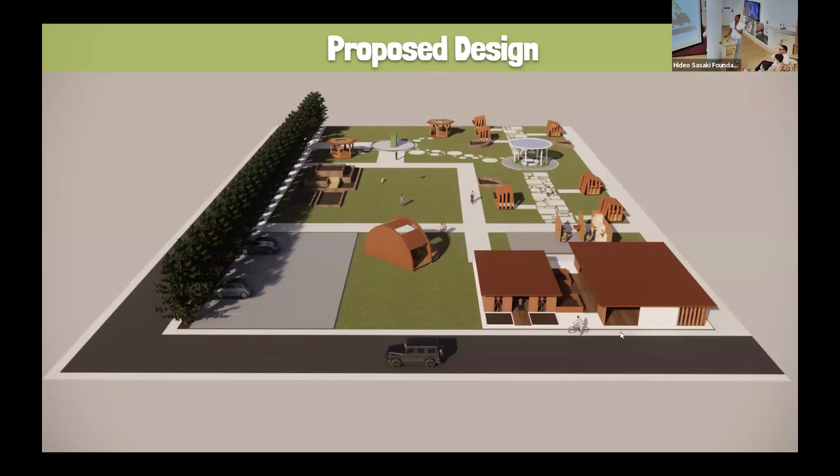So here's my proposed design. This is a key of how to walk through the site, starting off with the side entrance where people from the community center can easily walk through my site. Starting off, you will walk into a welcoming placard. This is a design that I believe can be used.

Moving on downward, you'll come into the walkthrough for the cubicles. Here I imagine a lady could be standing next to the fountain with her dog, and the fountain will have a green barrier. There will be concrete pillars and a glass roof.

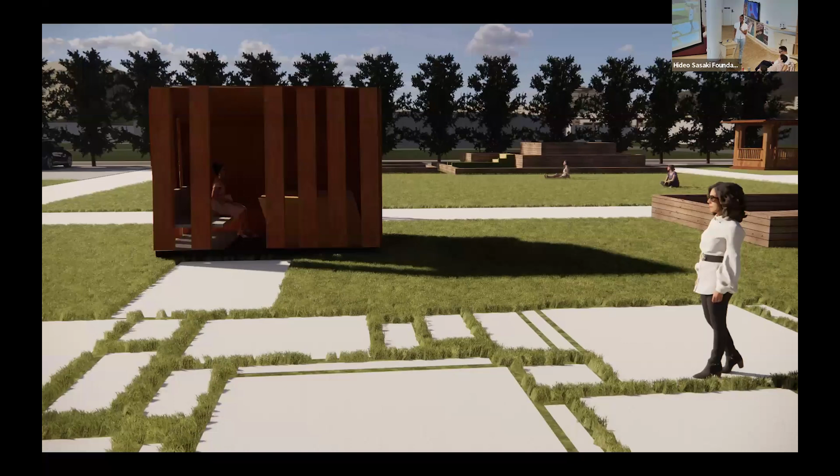Here's an example of the cubicle space being used. This cubicle is made with wooden planks, which is really great because it allows for visibility throughout the site, so even though you're in an enclosed space, you still feel like you're outside. The cubicle has a slanted roof to combat environmental challenges like snow, which happens in Boston.

Next off, we have the open pavilion. This is a space that children from Mattapan, and anyone in general, can use to climb upon blocks. It's sort of like a mini playground, but composed into one little wall section.

Behind it is a place where older seniors and anyone could chat or play chess and other games. This area also combats the issue of safety for children, since there's rubber plastic on the bottom.

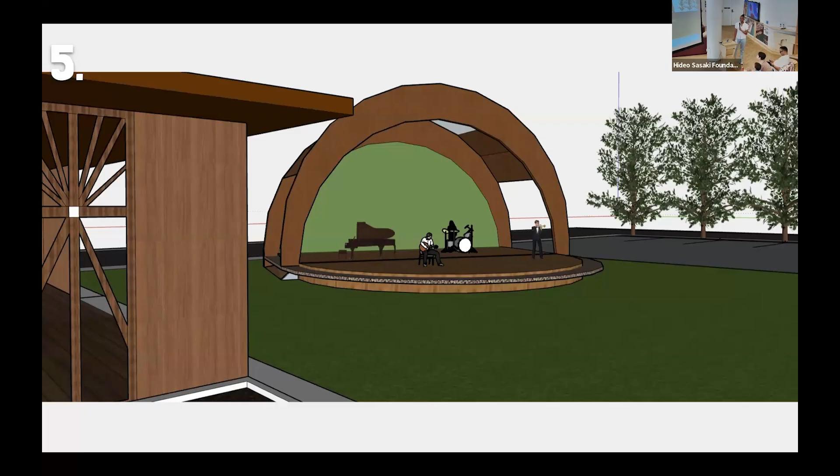Next up is a design that I have for a stage. Mattapan already has a stage inside of it, but I wanted to give the opportunity for people to perform, children to perform, and other musicians and presenters to perform outside on the site.

It's also connected to a larger pavilion, which can be used for chatting, just sitting around, and having community events.

In conclusion, my design will promote care towards the outdoors, create better security, allow for more use of public space, engage individuals towards learning about the environment and ways to manage a garden, and encourage socialization for everyone, especially teens and adolescents.

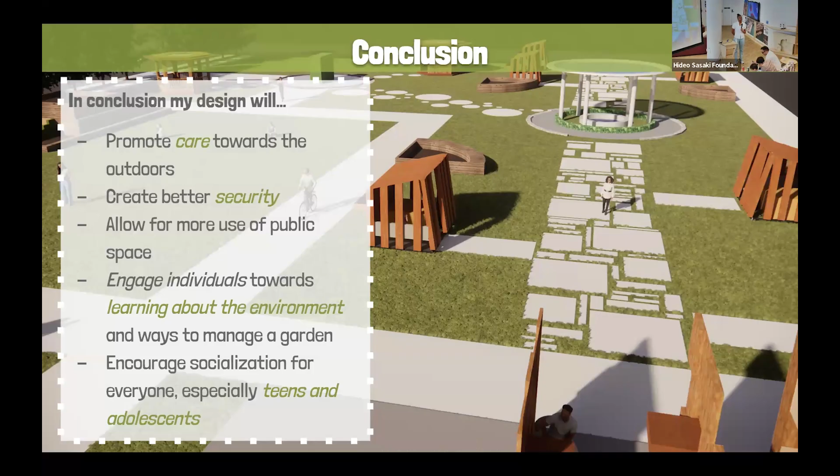I happen to be the chair for the Greater Mattapan Neighborhood Council, so I know this site very well. I grew up probably two streets over from what you're talking about. Could you go back to the screen that had the school, I think it was more in the beginning, where you were trying to give us a sense of location? Right there, okay. So there's the Mattahunt School and there's the community center, and as you said, there's Mattahunt 1, 2, and 3.

The nice thing I think that you did show was that that is a completely open area. And there is a need, if you have any ideas, about how you would connect from Livermore Street and Hebron Street, right? Because Hebron is a one-way, and when you're coming down there's a lot of traffic on Livermore, both directions. So how do you imagine that people would be getting to the site without impeding on the Pendergast Preventorium, which is actually conservation land?

But getting in and out of that area while discouraging cars, of course, how do you imagine that people would get to that part of the site? Thank you. So I imagine that people could get to that part of the site...

Well, first, I had an idea earlier on to extend the bus connection of the 31 bus route. I'm not sure if you could really see it here, but there's a 31 bus that parks right outside of Livermore Street, so you could turn onto it. So I was thinking that the bus route could extend and kind of circle around, because there is a roundabout area which would allow for that to happen.

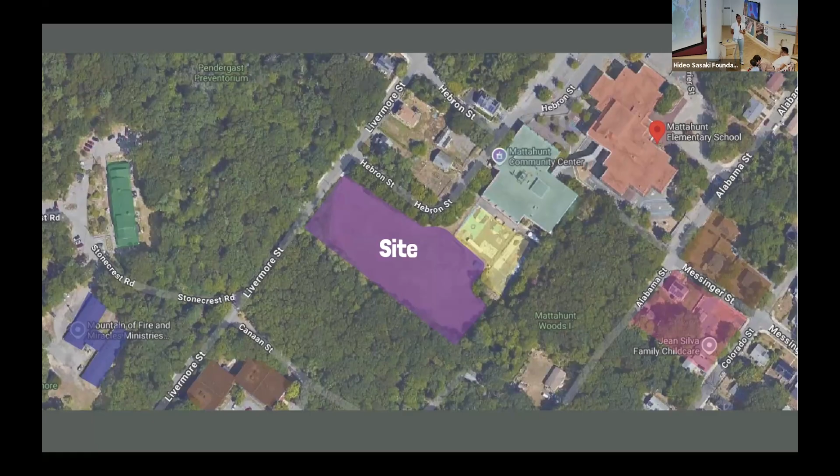Yeah, okay, so I would say some of the lessons learned was really learning how to implement my ideas for design in the available space that I had, because I feel like a lot of the designs that I was thinking of and trying to develop wasn't really correlating and fitting onto my site, and I had to figure out ways to keep it together and actually be logical and usable. Another challenge that I had was...

just figuring out the logistics, because I do have the parking space right onto Livermore Street, but then I have the side entrance further down where the community center is. So I think another thing that I would like to further consider is where my main entrance would be and how the stage would kind of interfere with that.

Good afternoon, everyone. My name is Kelly, and this is my project on Jamaica Plain's Flower Haven. Starting off with an introduction, I am a junior at Excel High, and I enjoy walking in the Arboretum during the summertime, but I also like to ski and ride my bike.

Here's a table of contents. These are the things that we'll be discussing today in my project, which are the background site analysis, problem statement, community engagement, proposed design, details, and conclusion.

With the existing conditions, this is my problem statement. The cracked and uneven pavement in the parking lot creates a safety hazard for its residents. A single use combined with intense sun exposure and impervious surfaces prevents people from entering and gathering, often feeling isolated.

With my solution, I wanted to create a vibrant place to gather safely. The community will feel a sense of belonging to have access to multi-use spaces such as murals, custom bike racks, seating, shade, and other engaging elements that merge together as one.

With the issue of my site, I want to create a survey to gain feedback from the neighborhood. You're probably wondering, why a survey? It would help understand people's experiences in the neighborhood, identify who lives there, give ideas for problem solving, and gives real feedback from people using the space.

Here is my proposed design. You can see furthermore into the design after, but you can see that there is a median between the trees, and there are 2 different sections to it.

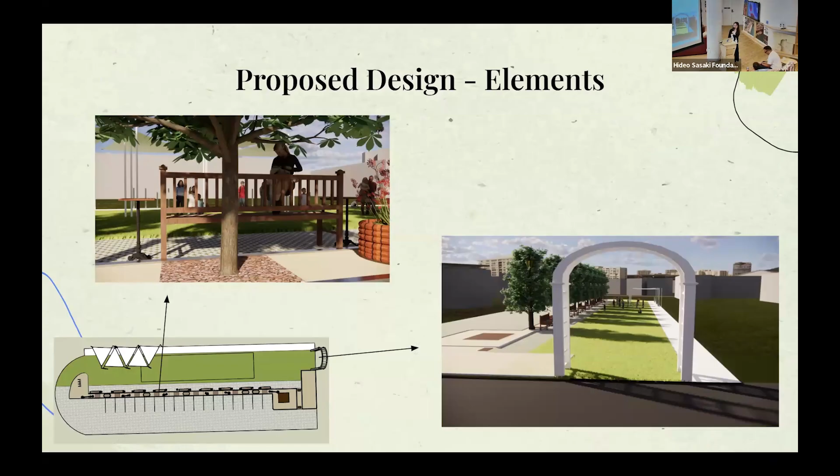Within the site, you saw these giant barrels within the median of my site. These are the garden beds. Up top is a side view and the plan views on the bottom. Here is a section of the different layers of the garden bed: soil, compost, plant waste, and wood.

Here is my final design. You can see the shading structures in the trees. With this image, I wanted to depict what it feels like walking into this space. The youth center I mentioned before would be able to use this space.

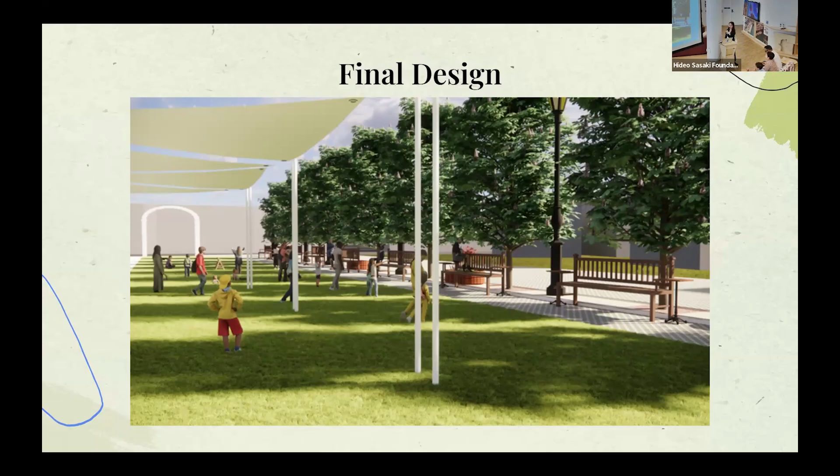In this image, I found that a lot of adults and children like to roam around in grassy areas. With this image, you can see that a lot of children are here with their parents. With this space, I wanted to turn this parking lot into a public space that can address some of the issues in Jamaica Plain, such as a lack of shade, seating, and greenery. Children, pets, and adults can enjoy a nice area that complements Jamaica Plain.

Thank you. The thing I've been trying to figure out is like, what are the actual causes of the hazards? I mean, like the actual cause of the hazards.

I feel like the majority of areas in Jamaica Plain are very crowded and busy with cars. So I want to create a space that is comfortable in the area, but also accessible for people that might want to go there, while also being able to drive through.

Hi, I just wanted to say great project. It was really thoughtful and your presentation was super clear. So congratulations. My question for you is, looking at your site, it looks like it's about half parking and half park in your design. I was curious how you struck that balance, and maybe why you didn't consider taking over more of the site and reducing the overall parking.

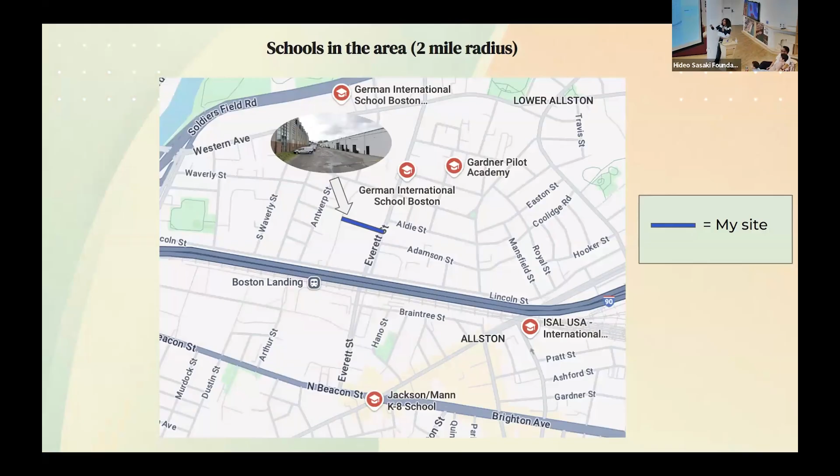This is my site, the blue line, and these are all the schools in a 2-mile radius. I wanted to show this because I went to the Jackson and constantly went through this area. If you look at this area, it doesn't look like a very good place for an elementary student to be walking through all the time.

There's lots of extra bodies of water—well, not bodies, but puddles. And I remember coming home and often having to change my socks immediately because it would be wet.

This is my problem statement. There is a lack of outdoor and community space, and also an overwhelming amount of concrete and unpaved roads. Concrete has lessened the visual appeal of the area, and water cannot infiltrate the ground properly because of all the concrete, which causes flooding. Brighton also has a high amount of 911 calls due to student mental health.

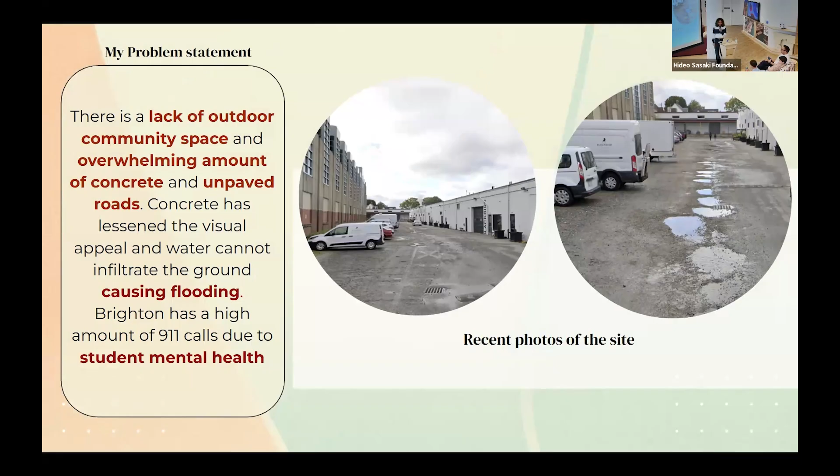After assessing my problem statement, I decided to make 3 goals: 1, to bring attention to the space; 2, to make the space green; and 3, to make the space accessible.

All the main answers to these were yes. I asked these questions because I often felt this way, and I wanted to see if people agreed with me so I could add that to my project.

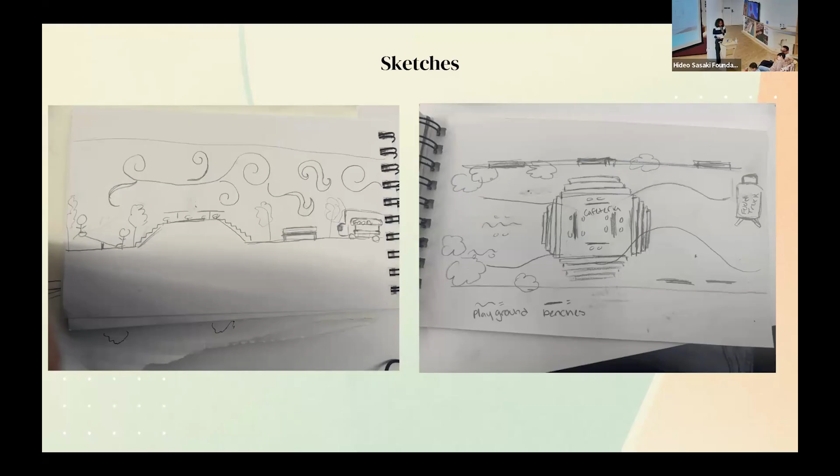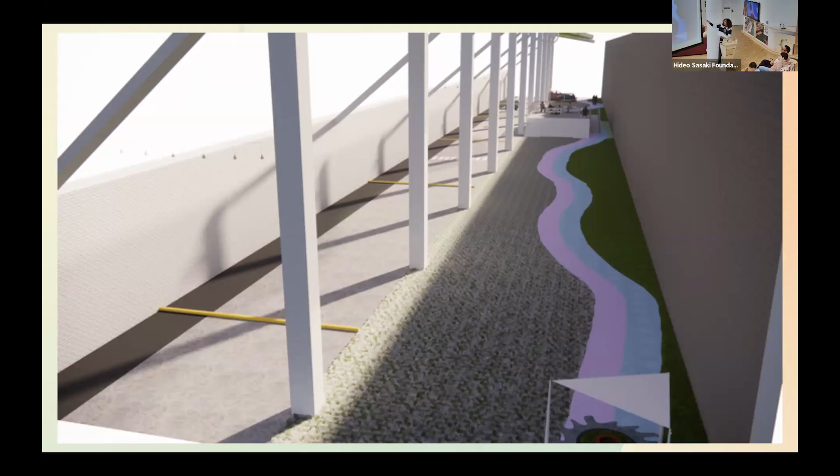And this is a picture of my accessible pathway, which follows ADA guidelines. And on the sides, I have a patch of greenery, which you can't see it from this angle, but there's glass roofing that curves along the line so water can still reach the grass. And there's also pervious ground on the other side. And this pathway leads to another bench if you want to maybe sit in solitude and read a book.

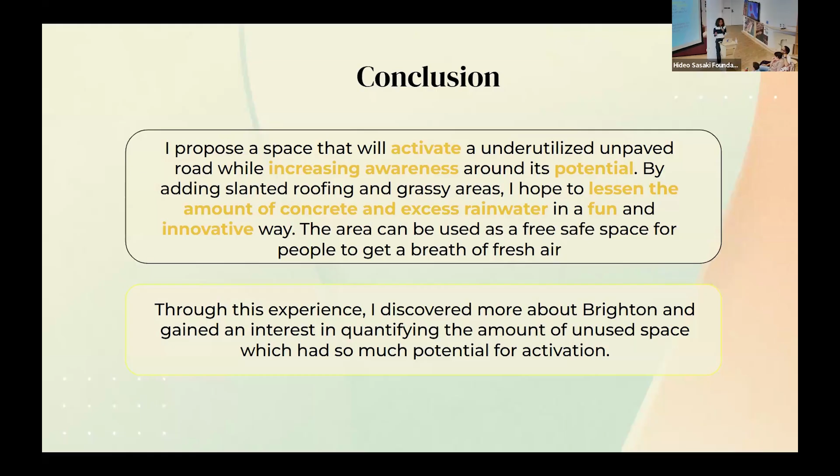In the winter, I sort of intended the spaces that were not in reach, like the wooden benches, to be packed away, and for this part to still be used since there's still roofing over it. I felt like it could still be used. Yeah, I think that's my solution.

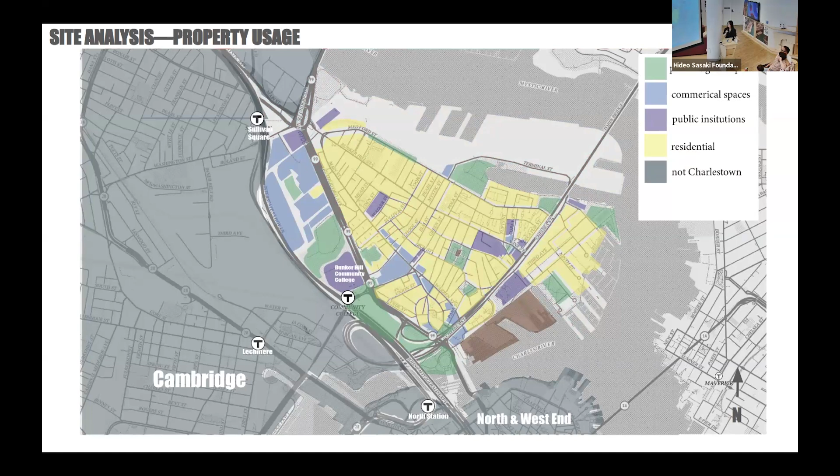While analyzing the property usage of my neighborhood, I realized that residential spaces are all on one side while commercial spaces are on the other. My neighborhood has a lack of connectivity linking major transit sites and development, creating barriers for pedestrians and limiting key access to other areas. This ineffective infrastructure hinders seamless movement and integration within the neighborhood.

So for my site, I decided to focus on this avenue because it splits commercial and residential spaces—this is Rutherford Ave, and it looks like this: a very wide and long avenue. Since it's so long, I decided to divide it into two zones, where I can focus on pedestrians having a safe crossing.

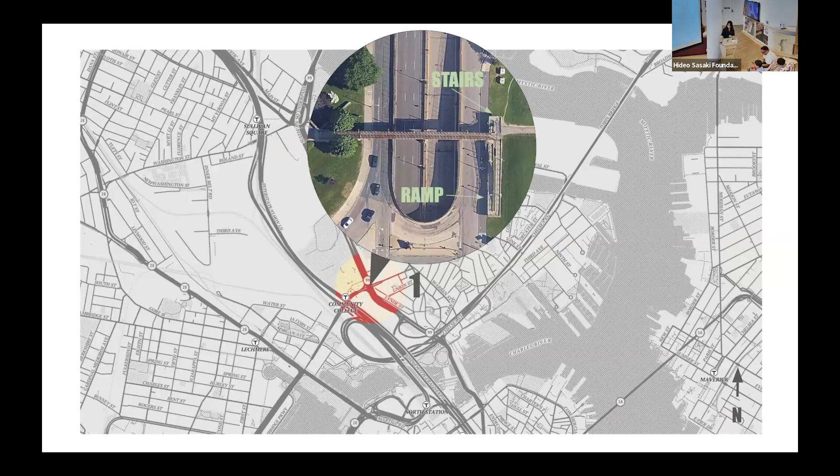Starting with zone 1, which currently has a bridge that allows people to cross, with stairs and a ramp. While surveying people, many expressed that there's unclear signage, very uneven roads, and potholes everywhere. They said crossing this bridge has a freeway feeling because of the whooshing sounds of cars passing by, and it's very time-consuming to get on and off the bridge.

I also asked people how often they took the Orange Line at this station, to get a sense of how many people utilize this bridge. So my plan is to basically remodel the stairs of this bridge, remove the ramp, and add an elevator there.

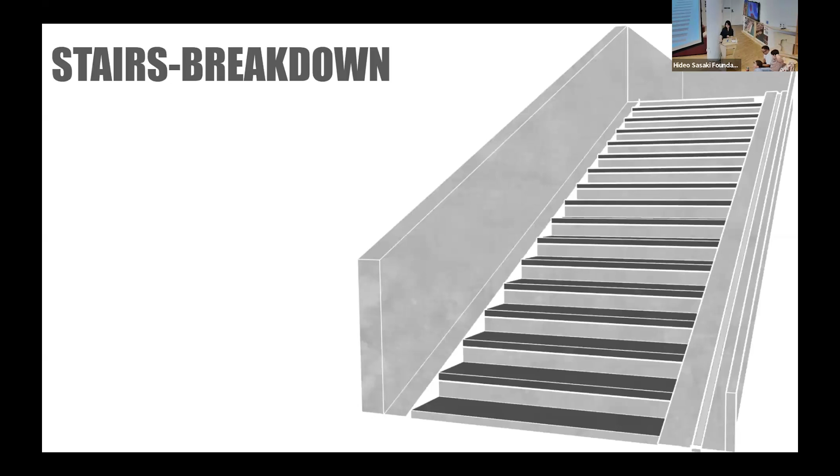Between my two zones there's the rest of the avenue, which I find important to improve to make my two zones more seamless. Within the avenue, there are at most 4 lanes of cars on each side. When surveying people to see if they were more aware of the sites around the second zone, clearly not many people were.

To address this area, I decided to look at other countries, specifically the Netherlands and Amsterdam. In the way that they've done it, switching from a car-oriented place to a more pedestrian-friendly one, they made their roads all one-ways, reducing the space for cars by replacing it with mini parks, and their sidewalks and roads are integrated in a way that's convenient for bikers.

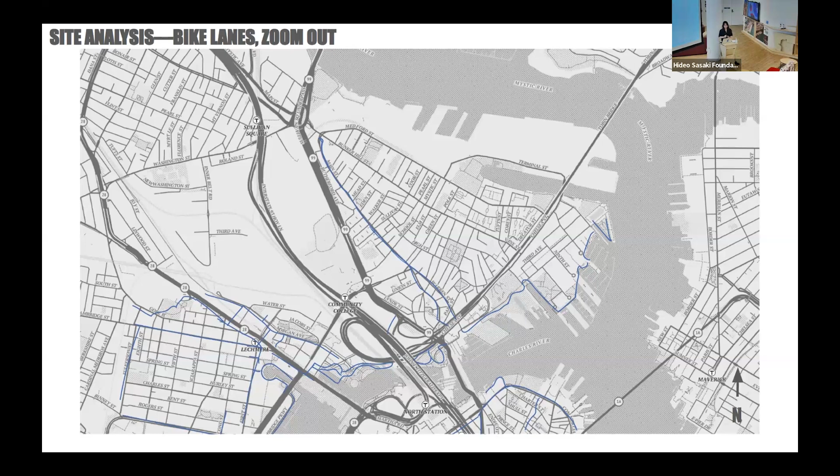Speaking of bikers, I decided to look at the official bike lanes within my own neighborhood as well as the neighboring city of Cambridge. Cambridge does a really good job with having a lot of bike lanes, while in my neighborhood it's a bit bare.

When taking a closer look at my own site, it does have a lot of Bluebikes stations, so people do have access to bikes in this area, but there just isn't much official bike lanes. That's why I'm proposing that on this avenue, we should take one of the 4 lanes that cars have and replace it with a bike lane. But since bikes aren't as wide as cars, they don't necessarily need as much space.

That's why I'm also proposing to extend the sidewalk so that when more people come, they can walk together and go down the avenue. I also decided to add more trees in this area as a way to guide people from zone 1 to zone 2.

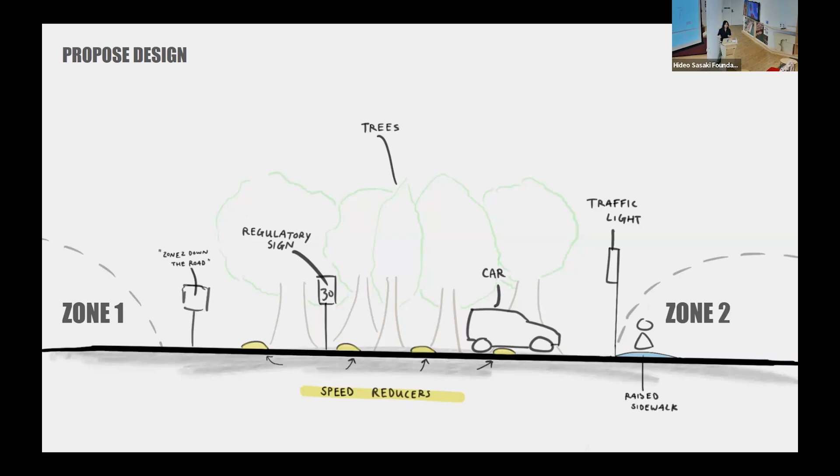Additionally, in this area, cars need to go more slowly, especially since now they can go really fast. My initial thought was just having a raised sidewalk, but simply having one raised thing to prevent cars from going so fast isn't as effective. So I decided that throughout this avenue, multiple speed reducers be added so that cars can slowly go through, so that cars know that this entire avenue should be a slower place, not just at a certain section.

And then we get to zone 2, which looks kind of like this. I call it a mini island. It's in between the lanes for the cars, and it's quite bare. It's currently not being utilized, which is such a waste, especially since people standing at this place have this amazing view of Boston.

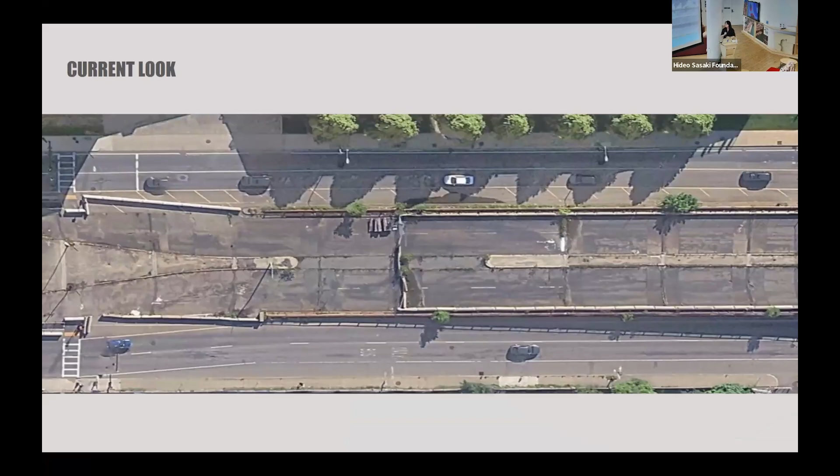While further looking at this little island that I call it, it's very concrete, very boring, very bare. That's why I decided that for my proposed design to add more greenery, add more dirt so that we can add bushes and make it a bit more lively.

Lastly, I decided to add a playground structure or exercise equipment so that people have an activity to do here, so that they're not just walking in for no reason.

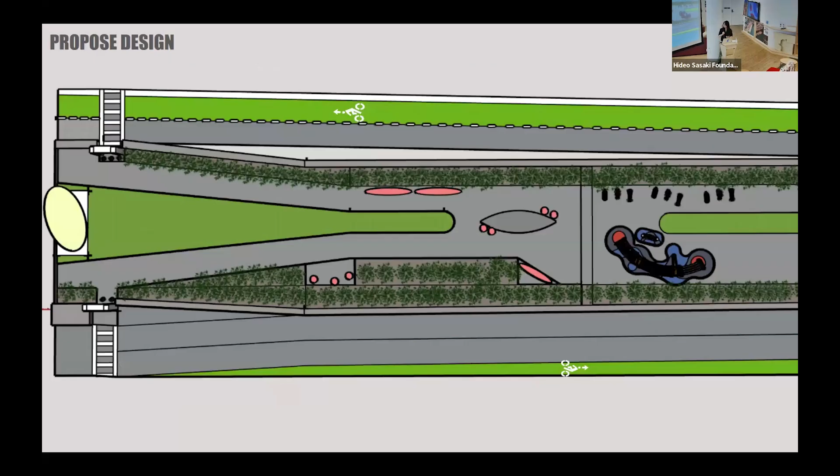Playground and exercise structures over here, with the exercise structure in front of the playground so that parents could get their exercise in while also watching over their kids. And then in the middle, there's a walkway and seating alongside so that anybody walking by, if they feel tired, they can just sit.

In conclusion, with my design, I had the intention of improving connectivity by integrating more pedestrian-friendly accesses into a car-oriented site to enhance safety, accessibility, aesthetics, and convenience. From this, I hope that Charlestown can be a bit more engaging. Thank you.

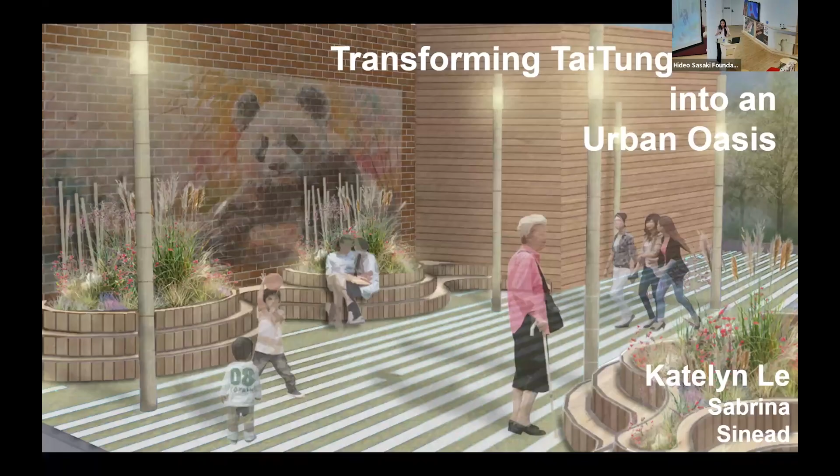Hi, my name is Katelyn Le, and my DESI project is transforming Taitung Street into an urban oasis. I'd like to thank Sabrina, my TA, and Sinead, my mentor.

I'm a senior at Boston Latin School, and next year I'll be going to Syracuse to study architecture. Another fun fact about me is that I also love shopping and going out, especially with this lovely woman here. She's my grandma, she's 80 years old, but recently in the past few years she's become more reluctant to go out, and she prefers staying inside.

When I asked her, well grandma, why don't you want to go out anymore? She said it feels like a hassle because she's scared of walking on the sidewalks and falling. And when I asked my mom, why can't we just get her a walker? She said my grandma doesn't want to be seen with a walker because she doesn't want to be viewed as handicapped.

So we're not able to walk around densely populated places like Chinatown the same way we used to. And when thinking about Chinatown, it has a lot of elderly residents, and it's also been historically displaced, both socially and environmentally, with mom and pop shops being pushed out and more food chains coming in.

Residents have to battle between limited parking spaces and green spaces. Talking to a community resident, she said there's tension over which space should be prioritized when thinking about what to do with these available areas.

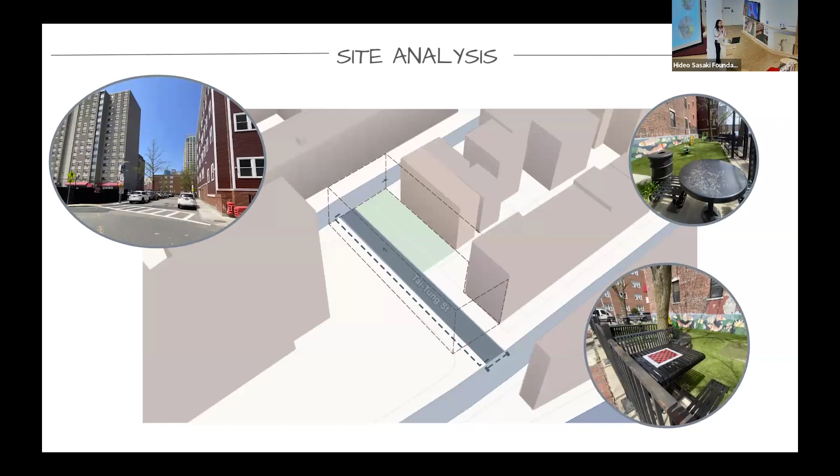Taitung Street is a small strip, but it's located next to Taitung Complex, which houses a lot of elderly residents. It has Taitung Park, but it's basically just a strip of green turf with seating that has no backing, and is made out of metal, which gets really hot during the summer.

The streets there are all one way, so at this intersection there are a lot of accidents. This is a huge concern for elderly using the crosswalks. The crosswalks themselves are narrow and have a lot of cracks in them, especially going toward the area considered the park.

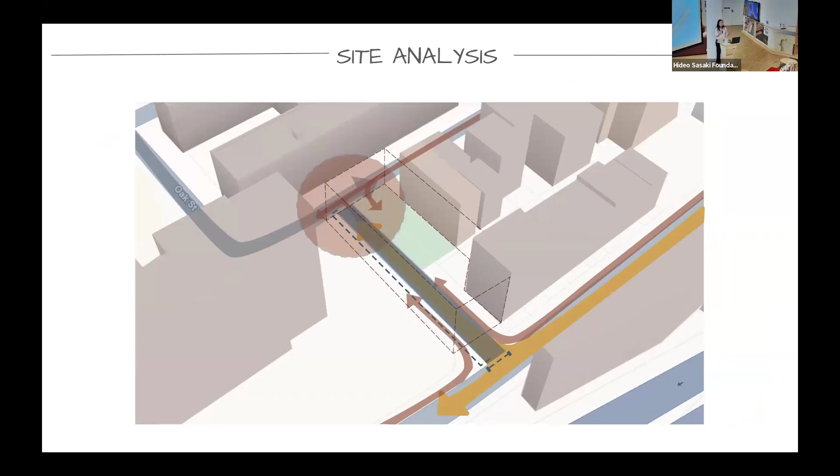Looking at all of these conditions, I knew I wanted to work on Taitung Street, but it's such a small road, and I wondered how this could contribute or help Chinatown in a broader context.

So the best way to figure that out was to ask Chinatown residents themselves. I interviewed residents, and one who has lived in Taitung Village his whole life said the scenery has become less enjoyable. I also asked Jenny Huang, a community designer at ACDC in Chinatown, who felt there could be more Chinese elements in the design.

We sort of see these Chinese elements in the area that we're in, but this area is more commercial where we see more restaurants, while more of the residents live back there where we don't see as much Chinese elements. So this led me to think, what is the overall problem?

Chinatown has historically been displaced socially and environmentally, and green spaces are limited due to the neighborhood's density, giving people no choice but to surrender outdoor recreation for practicality and functionality, going back to the idea of which space should be prioritized, parks or parking lots.

I thought about what are the solutions or main ideas we could do to tackle that problem. The first one was incorporating green spaces, making sure those green spaces created opportunities to engage residents.

I thought about how that idea could take form into the shape of the site. I knew I wanted to incorporate green spaces but also allow parking, then thinking about how residents could flow from one area to another, making the space one instead of just parks and parking. So when thinking about how to connect the two areas together, I wanted to apply a woonerf concept, which is basically a living street.

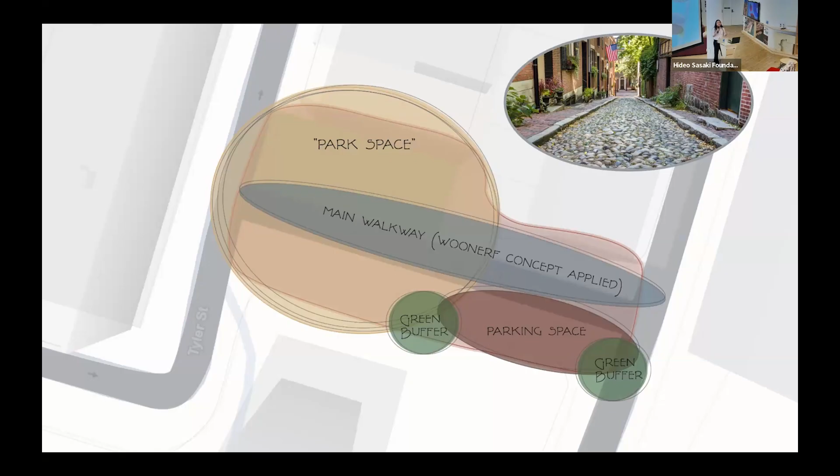We sort of see this in Beacon Hill, where people prefer to walk on the streets because it's better for the scenery, but they also feel safe because cars are driving slower, since the primary focus for cars driving there is just to go park at their house. Also including green buffers so we see this connection from one space to another.

I also thought about, if that's what we need in the site, how should it look? So going into creating organic shapes and keeping some sort of motif that connects one space to another, I thought about having curved seating that feels like it's shaping the area instead of being like empty benches when walking around the space in winter.

Also adding some extra seating, but also creating some pavement that follows from the parking area over into the park space.

Then thinking about opening green spaces in an area that's surrounded by a lot of buildings and infrastructure, I wanted to create this idea where greenery is coming back into the space through these variations of different tiles.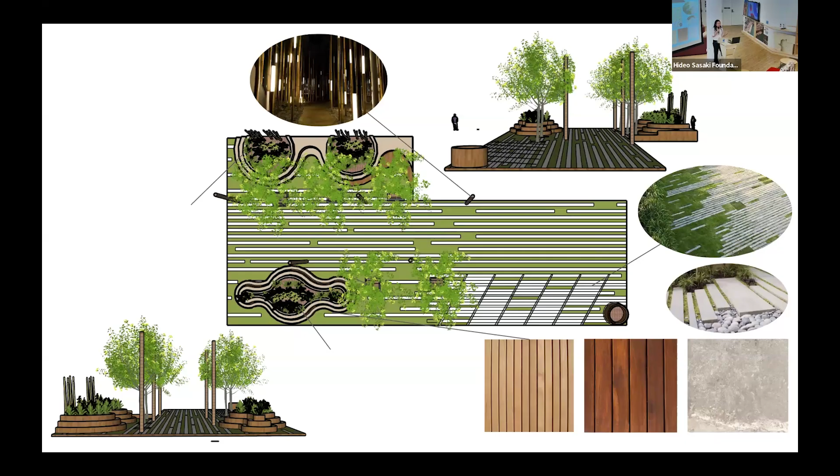Also thinking about going back to having a natural element but also a cultural element, I was inspired by a bamboo grove, where the lights would be sort of like bamboo lights, and the seating itself would be made out of wood.

Then thinking about having this curved, organic seating to juxtapose the surrounding area that's more harsh and concrete, but also giving backing to the elderly.

Also, of course, embedding different types of plants and vegetation into this area so that we're able to have a middle ground between what's functional but also what is sort of artistic.

Thinking about how the space should feel, it should feel like greenery is taking over and is able to come back after being pushed out by all these buildings.

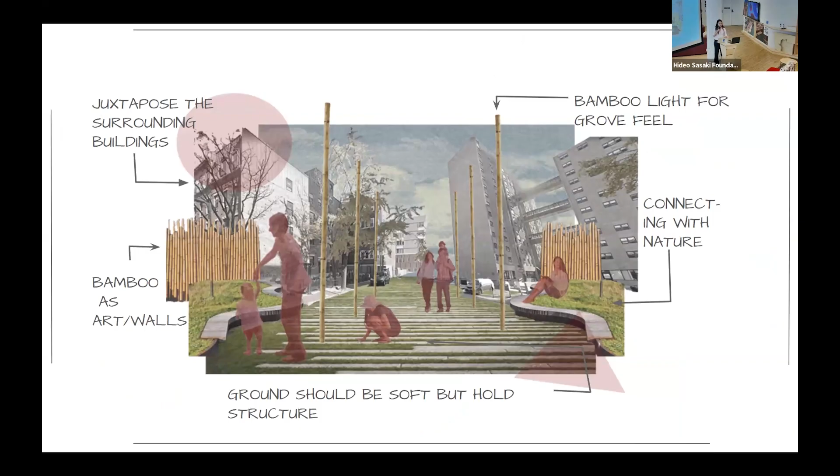From there, I decided to illustrate this idea through sketches and then SketchUp, also making sure we're able to tackle how this place has been environmentally displaced by having permeable pavement to combat runoffs.

Also thinking about how the site isn't just a destination, but more a way to benefit or improve your day-to-day journey when going from your house to the grocery store. I know my grandma gets tired really easily, so this could be a space for her to just sit down. It's also just an area to improve the surrounding area of Chinatown.

Then thinking about that organic seating and how when you're sitting there, you can feel like you're enclosed by all this nature and feel more safe.

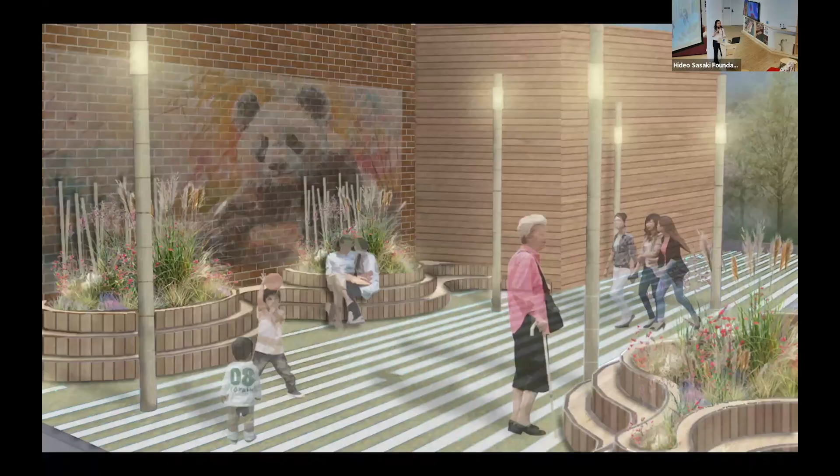Also thinking about how you can make this area safer at night by having that bamboo lighting. Because bamboo is an invasive species in Chinatown, it would just be more of a facade.

And this is going back to the idea of making things still functional, but also bringing a natural element. Adding bamboo to the sides and incorporating greenery in different ways, whether through the pavement on the ground or embedded in the areas or the existing trees. Also making sure that the spaces could be used for different events.

So this area could be closed off for more events that happen. We see these events happen more closer to Chinatown Gate, but we're trying to bring things back to the residential side so elderly have a more accessible way to get there. I could see my grandma going here and continuing her shopping for veggies. In fact, I actually put her right there.

So this whole idea is that this project is meant to celebrate the culture of Chinatown, but also tackle the problems between having a green space in such a densely built environment. This space is meant to be a bridge between natural elements and functional infrastructure, promoting outdoor engagement for all ages. Thank you.

Are there any questions?

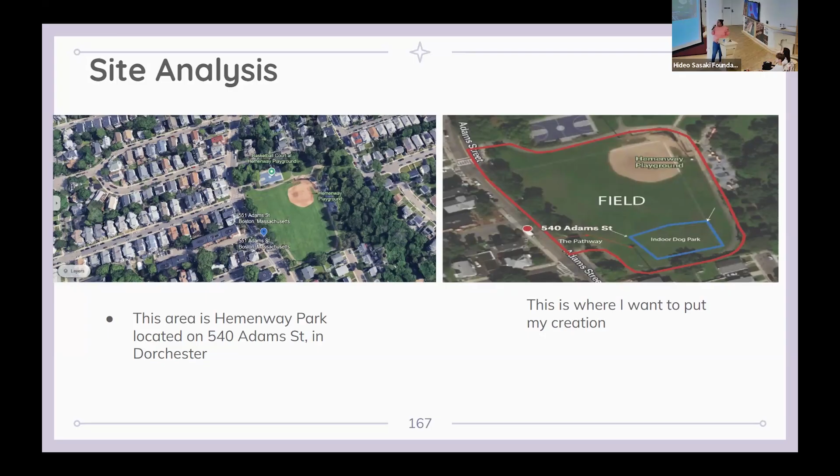This is where I'm gonna put my dog park. So I chose Hemenway Park in Dorchester. The reason why is the big field is very spacey, and that's why I chose it here in my design.

This picture is the main area of Boston, and it shows there's not really a lot of dog parks here. It's just, if it's a park, it's a regular park and not specifically for dogs. It's just for residents.

And my issue is that in Dorchester, Boston, it shows a lack of dog parks and parks in general around this area of Dorchester. Dorchester is one of the biggest areas of Boston, so it's really concerning how there's no dog parks when there's a lot of residents and owners who own dogs.

And this is my community engagement. I made an indoor dog park survey to see what they wanted. My questions were like, do you think Boston needs more indoor spaces for dogs to play? And majority said yes. Also my main question was, would you be interested in visiting an indoor greenhouse themed dog park in Hemenway? Majority said yes as well. I added additional features, and majority wanted a cafe seating area and training classes.

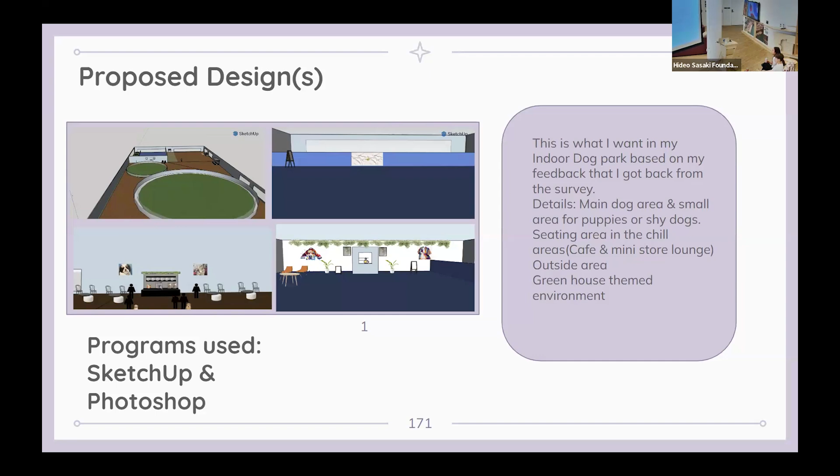And this is bigger, so you can see it more.

This is my Enscape design. So basically for the materials, I would like to use wood flooring and white walls. And after the outside, I wanted brick walls to make it more natural looking.

Also, the reason why I wanted this idea was because a lot of times outside, you see a lot of waste on the sidewalks or in parks. They state, oh, always pick up your waste, and they never do it, and it can cause a sanitary issue. Some kids can step on it, and it's very unhealthy, and you can smell it, especially in the summertime when it gets heated up and hot.

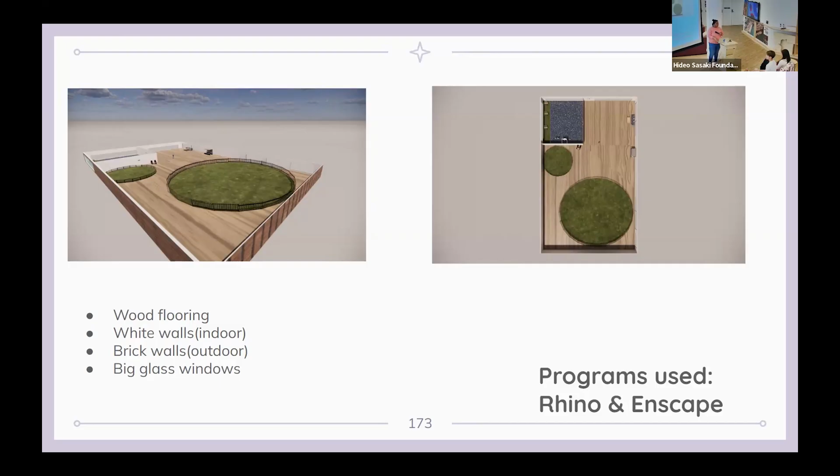I think this is really great that you proposed this because with Boston having pretty much 3 to 4 months of winter and also rainy weather, we've been having much more rain in recent years, it's very challenging to take your pet out, sometimes they don't want to go out. So it's a nice place where we could go and socialize with other pet owners. I know it's very beneficial to dogs, especially when they're alone all the time, but they can suffer anxiety and depression because they don't have stimulation from their owners. So it's a nice place where they can go and let it all out. And I appreciated the different sizes of areas that you have, because when it comes to puppies, you have to be so careful when raising them, or else if they have a bad encounter, they can become aggressive over time.

So it's nice that they have a space where they can just be puppies and not necessarily bump into larger dogs that might intimidate them or scare them.

I also wanted to state that I looked at other precedents and I noticed that there are other indoor dog parks in other states or countries, but they're more private. I wanted to make it more public for the space, and it costs them monthly. It's just very private, and I feel like that's very unfair.

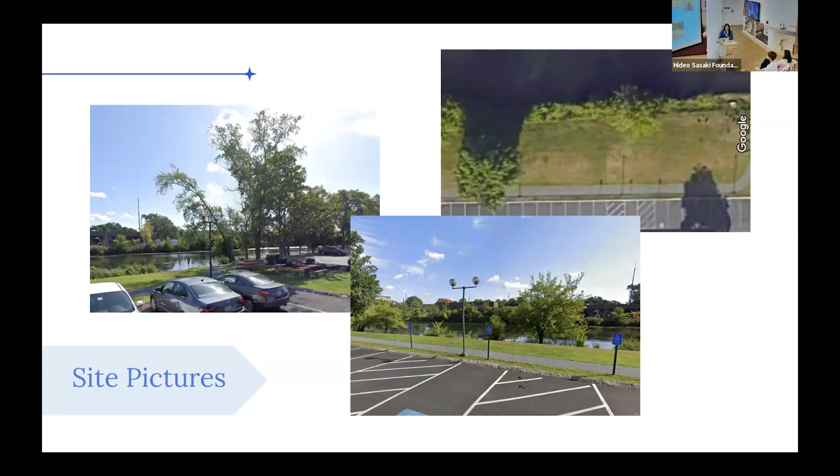These are the existing conditions of my site. It's about 65 feet by 25 feet. There's not a lot of seating. It's a very open space, but the sun hits it a lot, so it's not great for people to go there, and no one visits. There's a few picnic tables, but nothing else.

Some surrounding areas - this is Malden Center, and that's Malden High School where I go. From there to the Malden River it's about a 20-minute walk, and from Malden Center it's about a 10-minute walk. I wanted to highlight this area because it's very commercial - there's Toile Joie, a bakery, galleries, and entertainment. There's a lot of foot traffic, and I want to encourage people to go down there and enjoy a third space, which we need a lot in Malden.

My area has a lot of trees and a bus stop for the 97 Wellington, so it's very easy for people to get off there and walk down to my site, but they currently don't because no one knows about it. Through my community engagement, I realized that 20% of people don't know about it because it's a very isolated and neglected place.

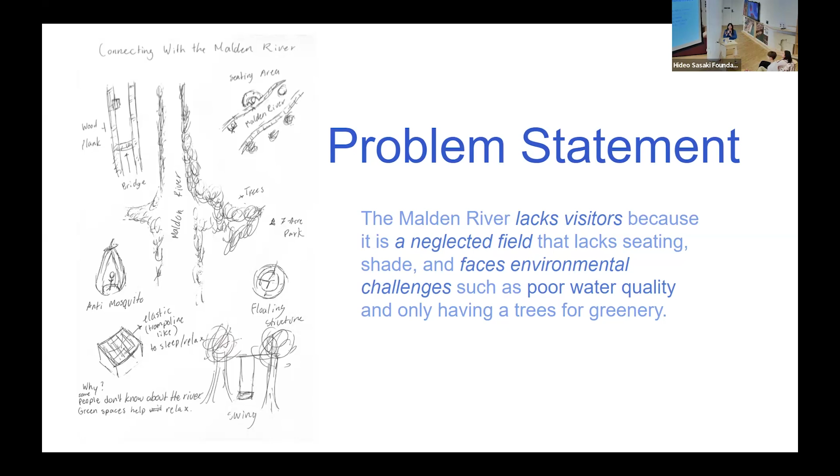So that is why I came up with a problem statement that highlights how it lacks visitors because it doesn't have seating, and it also faces environmental challenges such as poor water quality. It only has trees for greenery, so it's not very attractive.

I also asked people what they wanted to see. I released a survey, and people said they wanted food trucks, floating wetlands, a walking path, and a bike rack. So I tried my best to incorporate this in my design because I want people to actually use it.

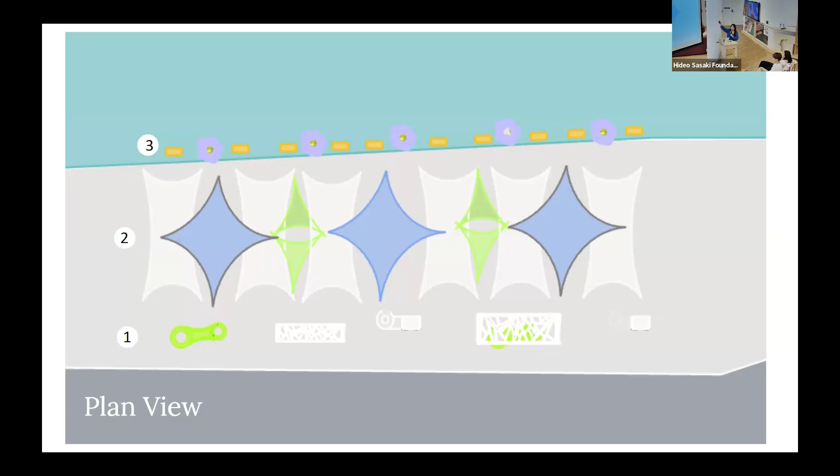This is a plan view of my site. This over here is the grass. There's a lot of seating, while the place with the canopies is a very open field, open for picnics and everything else. Down here is the riverside, where I included floating seating and wetlands.

First I want to discuss my cubby seating. I wanted to make a more private space for people to just read, do their homework and whatnot, because I know a lot of people want their own space to be more productive. However, I didn't want them to feel isolated.

Some of the details: it has cushions for comfortability, and it also has interactive signs on the outer walls, because I want people to post posters or community events so that they stay informed and connected.

It also has solar cells, which provide energy for the outlets so people can charge their computers and phones - I know my phone always runs out of battery, so it's great. And at night, I also wanted solar powered lights, so when people walk in that area at night, there is going to be light.

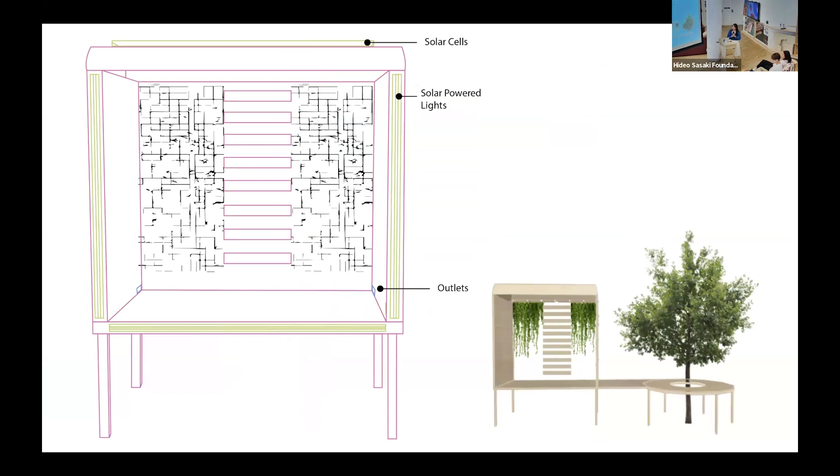And I wanted it to be made out of polywood because I wanted this place to feel warm and inviting and comfortable.

So the next one is the seating and community garden. This is an early sketch of what I wanted it to look like. I wanted people not only to have a community garden, but to feel like they are one with it. It also has raised seating, so it's accessible for people with wheelchairs. This render highlights how people would use this, even animals and children.

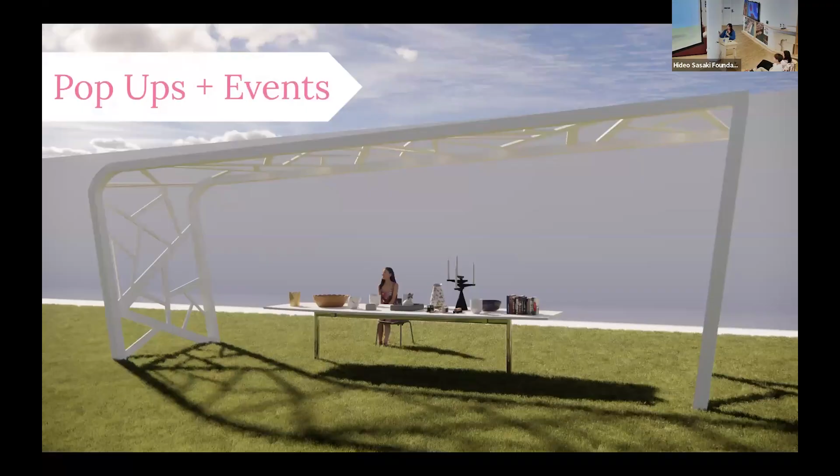And I also wanted to add this pavilion because I wanted people to have the opportunity to have pop-ups or events to sell whatever they want, because it is a great way to support small businesses.

The wetland and floating seating is something I really wanted because I wanted people to feel like they were part of the river and that this river belongs to them, so they can take care of it. This is an elevation of the floating seating so people can step into it and enjoy themselves there.

For the wetland, it is to improve the water quality. It has a shrub layer with high bush blueberry, a herbaceous layer that contains grasses, and the ground layer contains decomposing plants and soil, and the subsurface layer has organic matter. How this works is the shrubs go down into the water and the roots absorb all the chemicals and extra nutrients the river has, which improves the water quality.

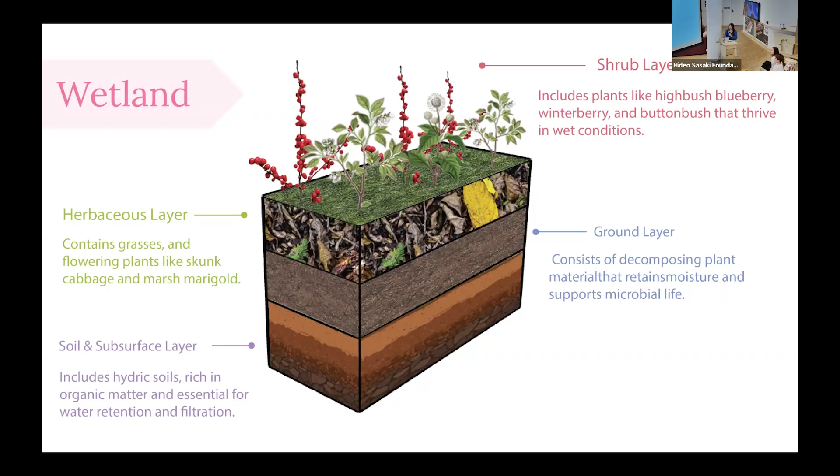In conclusion, I want this place to encourage people to visit the corridor, to take care of the river, but also to be a third place for people where they don't have to pay. They can just go there and enjoy themselves.

I also wanted to unite the community by hosting events and increase interactivity with nature, since I know that's a very big problem nowadays. So that's why I included floating wetlands. Thank you. Questions, comments?

Hi Nelly, this is really amazing. You incorporated so many different elements: selecting the proper site, sustainability, solar energy, and connecting to nature, taking your initial ideas and concept all the way through developing little details into the seating spaces. And then obviously the materials, thinking about the whole project holistically. So really amazing job doing that.

My only question is, would you consider applying all of the learnings from this project to any other local neighborhood projects or areas to develop?

Thank you, that's my mentor by the way. So shout out to Ankita for all the help, and also Sabrina, my beautiful TA.

Talking about that, I forgot to mention, but down my side there is the Malden River Park, a project that the Malden River Works is currently working on. It's more parking, more open space, and there's also a boathouse for the high school. But I love this idea of connecting people with nature. I feel like if we can incorporate that all over the place, it would be amazing, because it helps with mental health, and having access to these third places allows us to coexist with one another.

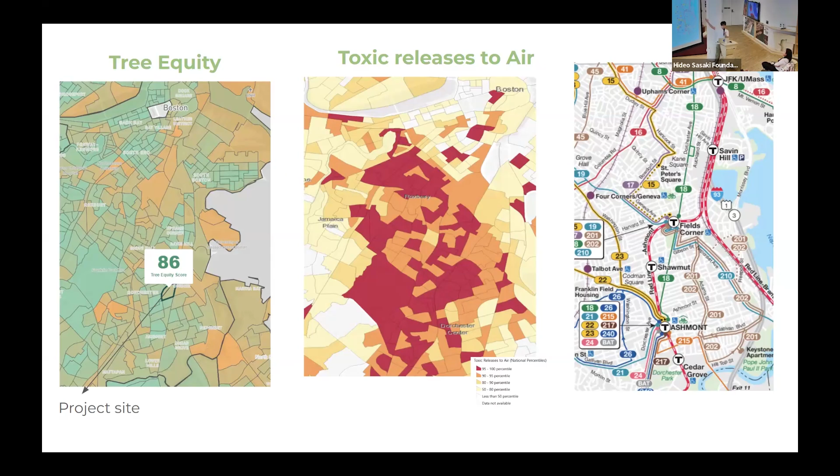All right, my project site. I have chosen the one marked with stars. It's located at 493 Geneva Avenue, next to Fields Corner, and also this retail commercial space.

So who's being affected by this? In this area there is a school, a public library, a park, and big retail stores. This bus stop is being used a lot by Dorchester residents. This is Dorchester Avenue, and this is Geneva Avenue.

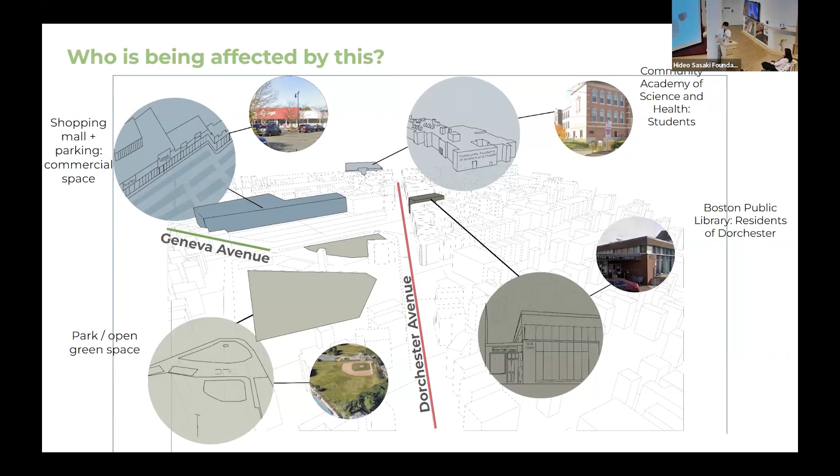Problem statement: in Boston right now, public transportation plays a crucial role in the everyday commutes of people because the MBTA bus stop serves over 350,000 riders per weekday. Bus stops are meant to provide shelter from harsh weather as well as safe waiting areas, but with its current design, it often fails to meet those expectations. To address those issues, I want to redesign the bus stop at 493 Geneva Avenue to ensure both public safety and comfort.

Oh, what the? Well, I'm sorry about that.

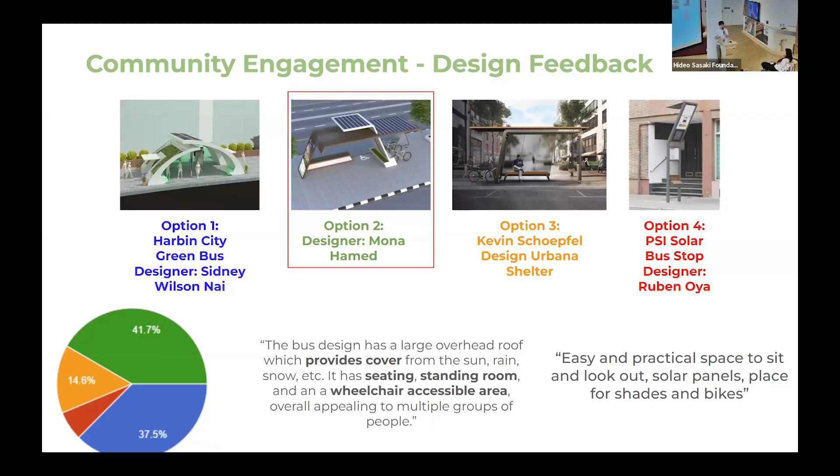Before heading to my design, I want to get a little information. Right now, in Boston, we've emitted around 5.4 million metric tons of greenhouse gases, that's almost 11 billion pounds, from energy use in buildings and transportation.

I want to take that into consideration because I'll be incorporating microalgae into my bus stops. Microalgae practically absorb sunlight and carbon dioxide to produce oxygen, so it practically acts as a filtration system. Why microalgae? It requires less space than trees, works 400 times greater, and is sustainable and low maintenance.

This is my design process. At first, I just had an idea that I wanted to do something with microalgae because it's innovative and new, and I wanted it to bring awareness to the global warming issues happening right now. I also saw that bus stops have been very overlooked.

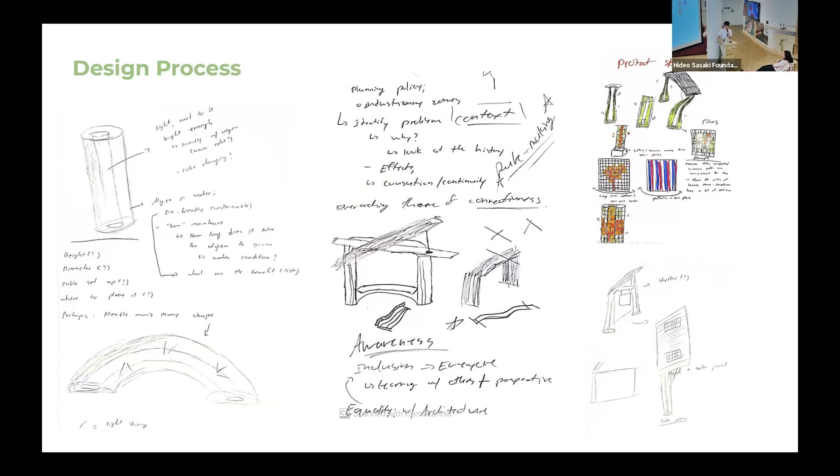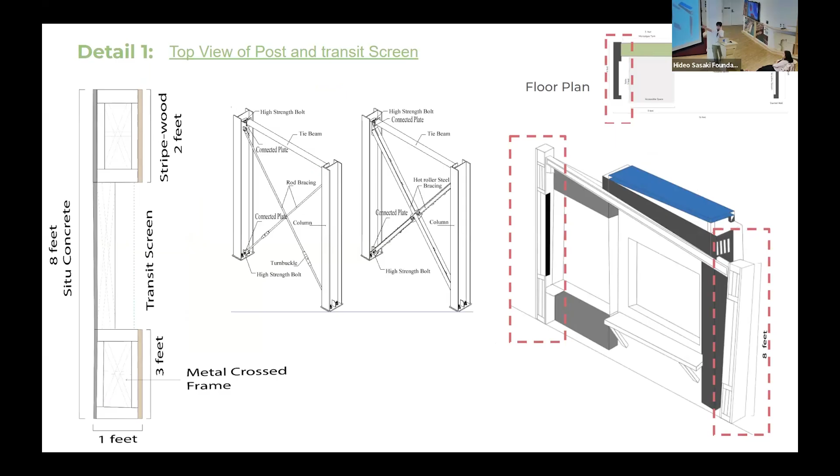This is the detail of what the side of the bus stop would look like. I'll give you a second to look. On this side, it works kind of the same as the other side. And this is an exploded axonometric showing how the roof might be supported by the pillars.

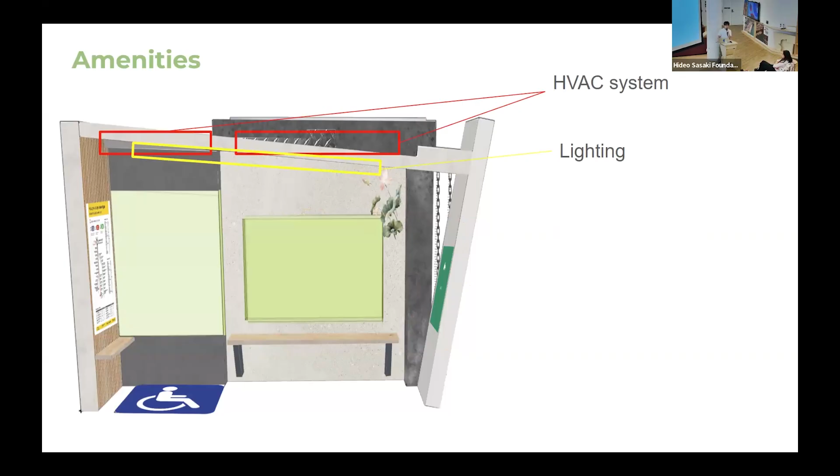Now this is my bus stop. As you can see, there's a lotus on the side, emphasizing the Dorchester community. There's an HVAC system that works in summer and winter, providing heat and cold air for active riders. There's lighting for safety at night so people feel safe within the bus stop. There are transit arrival screens and an interactive screen that tells riders what this structure is, or when the bus is coming. There's an outlet so people can charge their phones or other devices. There's also an accessible space and a small surface for bags and other items in the corner.

On the side, there's a rain chain that allows rooftop water to flow downward and be filtered. There will be posters on the side, which could be job postings, local restaurant advertisements, or art from local artists. I want to emphasize that this should be locally sourced within Dorchester, which will enrich the local economic prosperity.

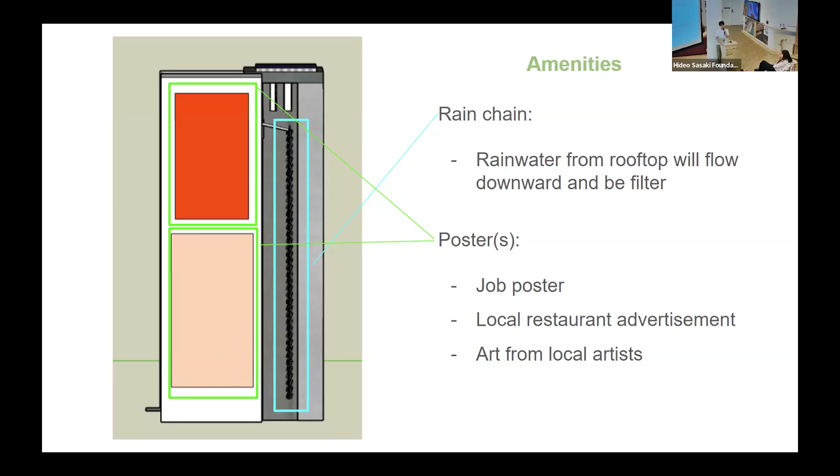This is what my design would look like in real life and how it would interact with the space. That's my money shot.

Conclusions: the bus stop solves three main problems — comfort by providing these listed items, safety by providing lights and a closed space, and bringing more awareness to the global warming crisis because it contains microalgae and an interactive screen explaining how it works and why the structure is there.

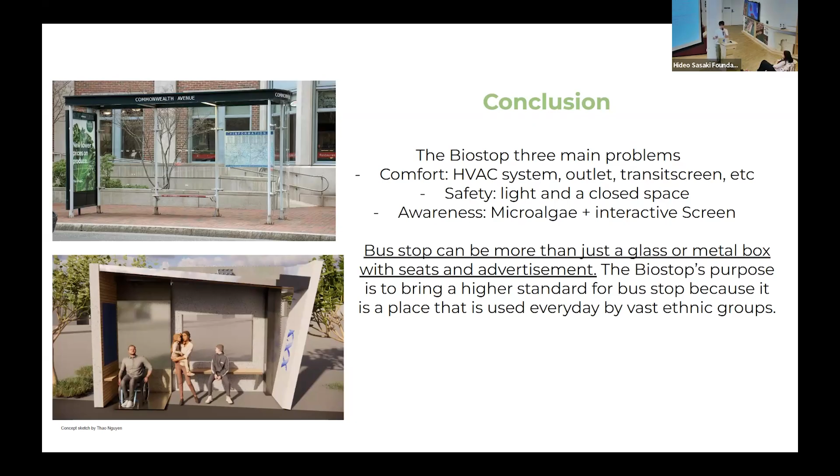A bus stop can be more than just a glass or metal box with seats and advertisements. BioStop's purpose is to bring a higher standard for bus stops because it's a place used every day by vast ethnic groups. It's important to say I don't want my design to be everywhere — I just want to bring the fact that a bus stop can be more than it is right now. Thank you.

Questions, concerns, comments? No.

Hi, I just have some comments about your presentation. You've done such a good job of incorporating your slight humor. Even in previous presentations, I really enjoyed sitting through the little jokes you make to keep people engaged, but also how clearly you express the issues you're addressing and how you close them out really well in the end.

One of the most powerful statements, which I really agree with and resonate with, is saying that our everyday spaces should be much more elevated because it happens everywhere. I wanted to direct you to an architect of that same mindset, Tatiana Bilbao. I'll write down her name for you. One of the most powerful things she said in a recent speech is that living happens everywhere, and the way she communicates her spaces really responds to the everyday moments of life.

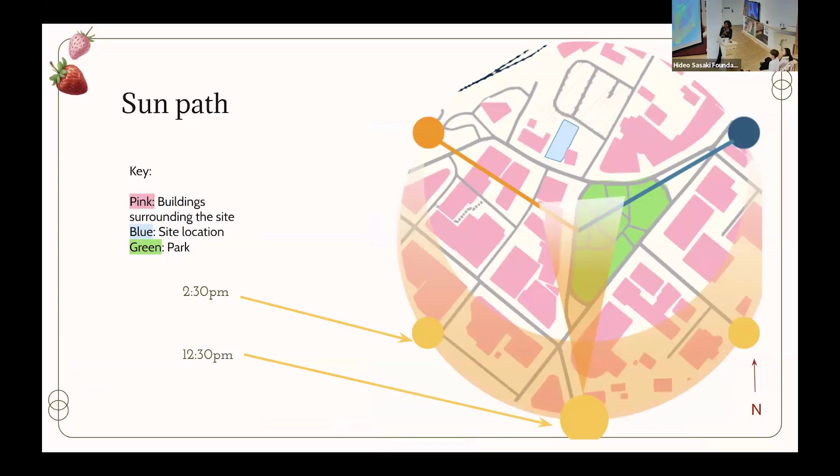So my main issue with the site is it's usually largely unutilized and has no natural lighting, with a lack of regard for pedestrian safety, and is really just uncomfortable to be in.

So my goal is to create a community space that is relaxing and creates a home, or like a home outside of a home, that can be rented and used for the winter's farmers market, and that will have a green roof that supports the biodiversity of Roslindale.

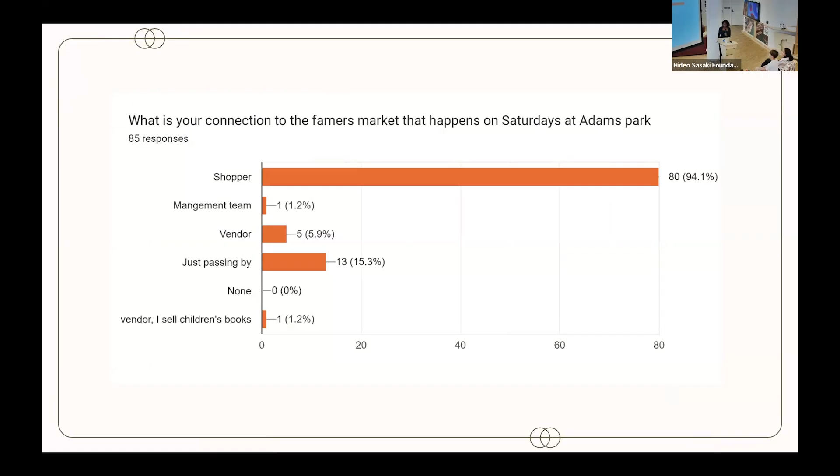So my next step was taking it to the community to ask for their input. A lot of people were shoppers and people that just passed by, as well as the management team for the farmers market. So I sent out 2 images.

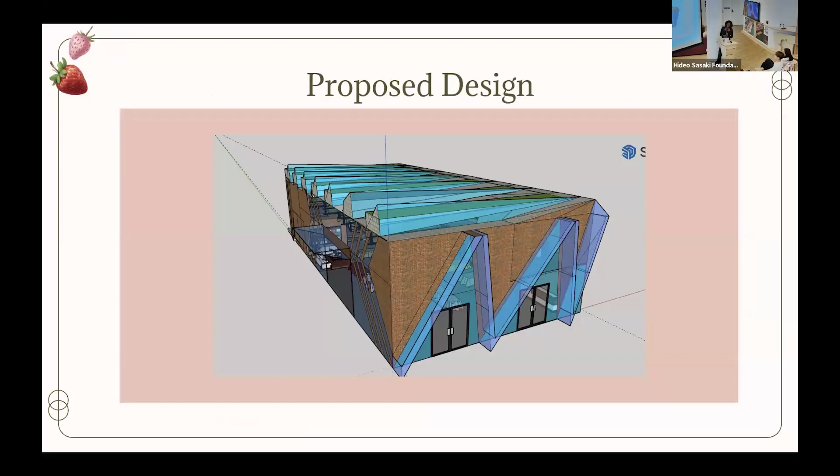Taking that feedback, I was able to make this building. It has a glass entrance to let in light from the south, a green roof with skylights to amplify the light, and a side entrance to make the building breezy and not too cramped. There's also glass paneling, again for natural light, and a back entrance. The roof has drainage.

This is my video of the farmers market, on a Saturday winter day. The space can hold around 12 vendors with different kinds of goods.

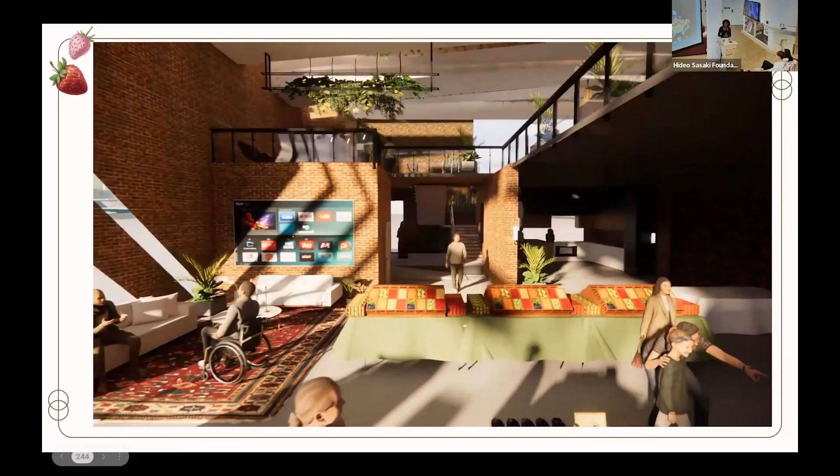In the back is an elevator, as well as a ramp, and also a storage area in the bottom right, and also stairs. This is the upper floors.

This is just a place for people to hang out while the farmers market is happening, so they have somewhere to just take a breath. In the back is an office for the person who works there and organizes the events that happen in the space during the week.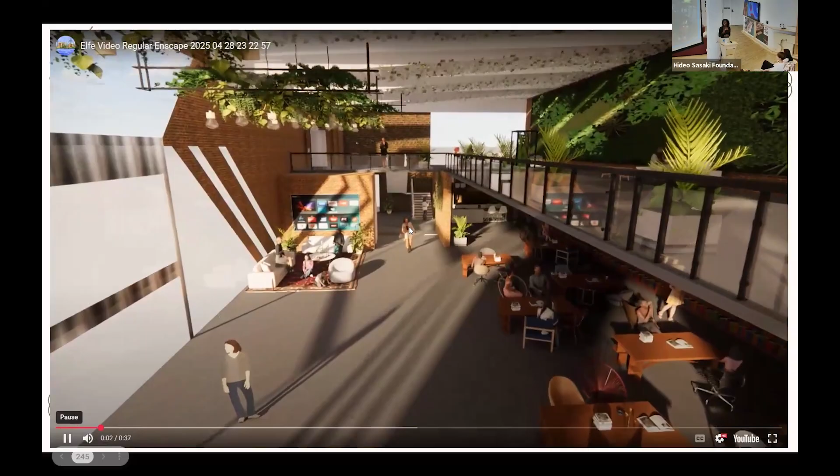This is during the week without the farmers market. Again, it's just a place for people to come during the week to do homework or work. It's just another home for people, and it's 100% free to be in. There's a kitchen in the back for cooking lessons or for people to just cook and have others taste their food, and also a bookshelf where people can leave books and take books. It helps with education systems.

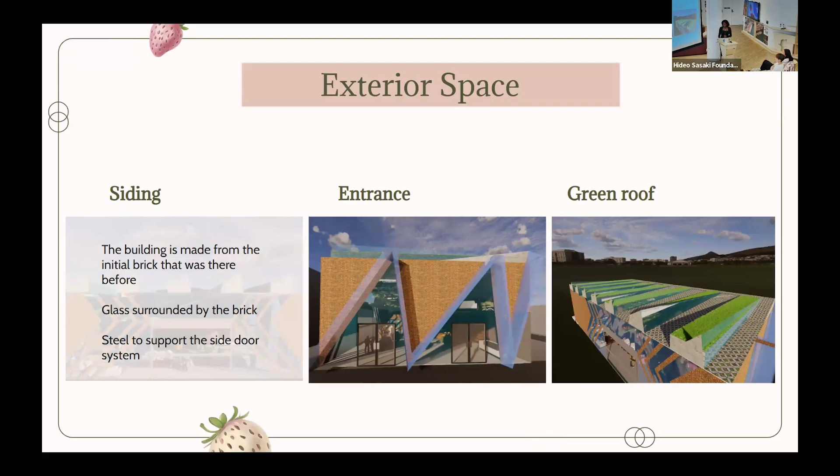Moving on to my materials. I wanted to focus on the exterior and the exterior spaces. My siding is made out of brick that was in the original building, surrounded by glass for natural light. The side door will be supported by steel. The entrance will also be made of glass and have brick to hold out the exterior wall.

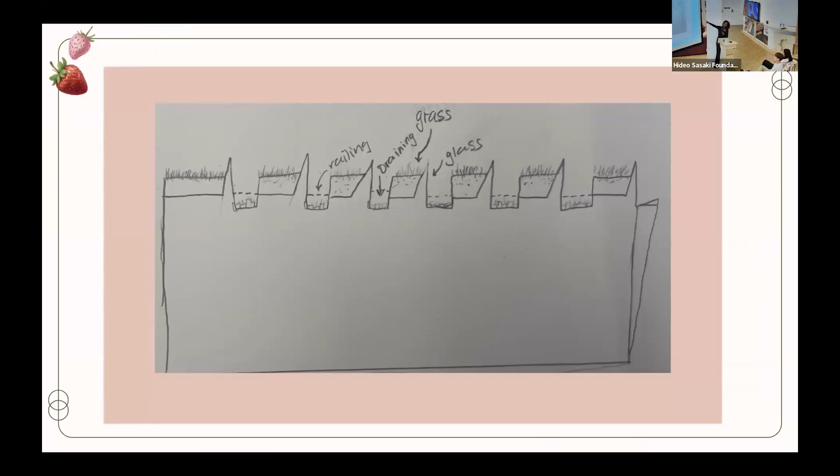Moving into the details, this is just a quick sketch of the materials that would be used, like glass, grass, and a drainage system. I also have a railing, and the dotted line is for maintenance and safety. This is my side door - basically it's going to be a remote system, so no one will physically be moving this. It's just a way to make the site more breezy and more comfortable to be in.

In conclusion, my design is to create a space for events and farmers markets with a green roof to support Rosendale in both community and biodiversity. My future goals are to create a plan for people to access the roof for maintenance and develop a draining system for the roof. Thank you.

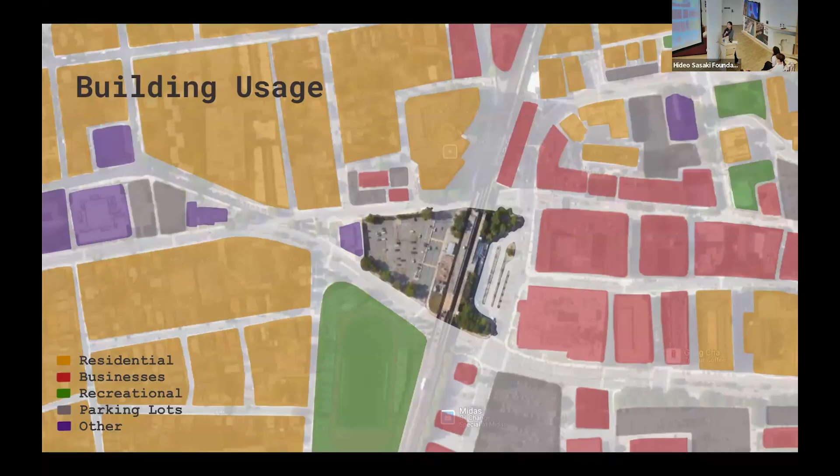A little about the site analysis: mainly on the west side it's residential, and on the east side there's a large concentration of retail stores. This is sort of the center or hub of Malden. In addition to the Orange Line, there's also the commuter rail, which makes this a very densely packed commuter destination for those taking it elsewhere. Malden is also very walkable - people walk here to everywhere, their homes. This is also my connection to work, friends, and family.

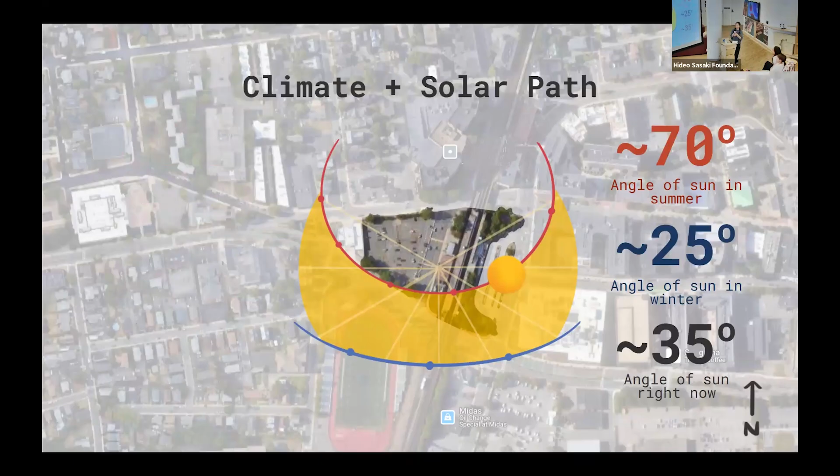Here's the climate and solar path - similar to Boston, it has crazy hot summers and very cold winters with snow. Here's the angle of the sun in summer - basically no shade, especially when people are using the field and practicing, it's going to be very hot and you can't find any shade, since it lacks a lot of structures.

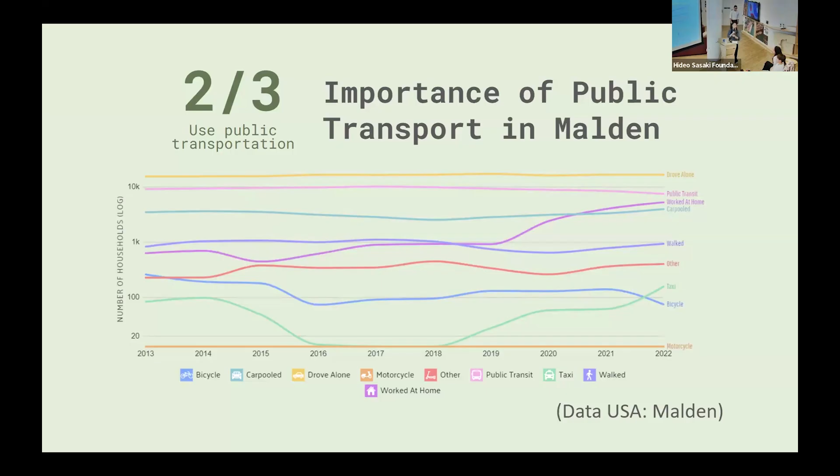Here's the significance of public transport in Malden, which two-thirds of the public use - especially even if they own cars, most just park at Malden Station and go to work through Malden station. This includes a lot of young people starting from age 6, because there's a local school nearby, and also a bunch of seniors. Here's a survey I conducted mainly on Malden residents, although there's a slight unintentional bias towards youth.

So I went through this whole process of thinking, what type of shading should I add? Or how am I going to include greenery, especially when it's just a block of concrete with no actual existing soil? I went through a bunch of ideas that were kind of unrealistic.

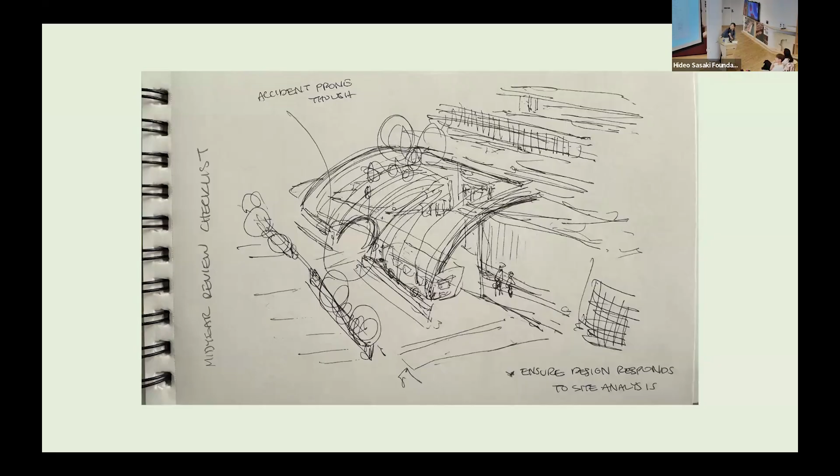I had this idea of a large overhang, but that would block out the sun entirely. So I narrowed it down into these smaller rest stops for people.

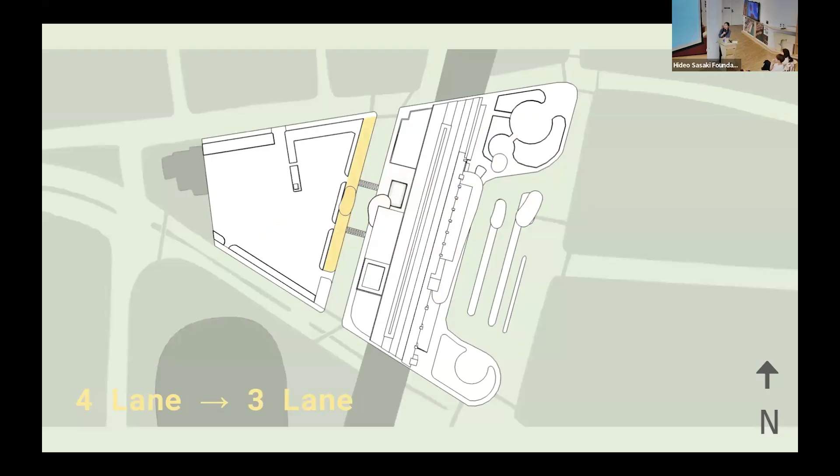So those are the improved entryways. They'll be widened, and also adding another entry for the cars. And also more greenery - there is some existing greenery, but we can never go wrong with more greenery.

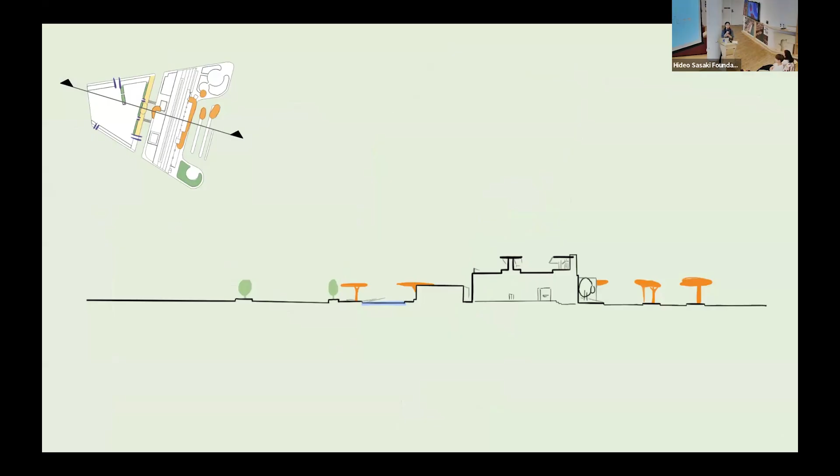So here's the proposed design, but what does it actually look like? Here's a section to show how spaced out the rest stops are, so that people have this area to rest if they need it, especially for their particular bus, and not just having to run to the bus when it gets there.

Here's the distance of how far you're walking. The section looks small, but that's because it's so wide I couldn't fit it all.

So here's what it could possibly look like with the rest stops. Those rest stops are designed to be high enough so that a bus couldn't hit it, and also the rain would fall elsewhere.

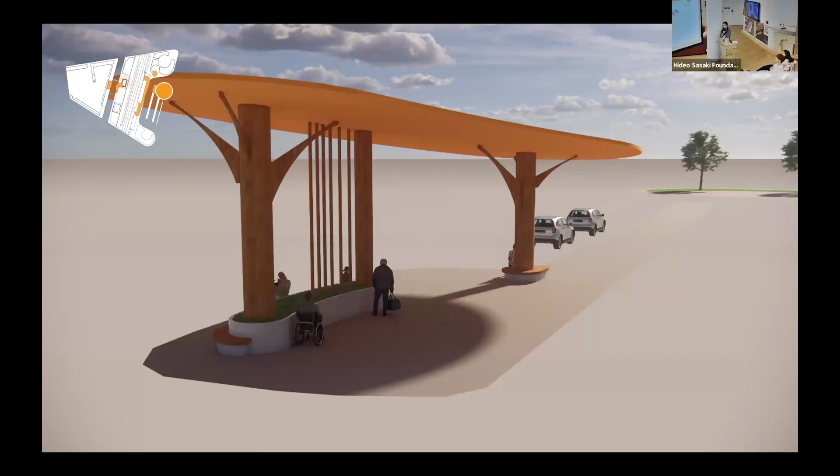So this is one rest stop where it could be - this is on the farther east side, this is on the other east side as well. And this can also be for where people are waiting for people to pick them up through cars or buses, and there's also significant shade for them.

This is like, I think, at 2 p.m., which is when I would get off work, and I need that shade. So here's just the framework - it's kind of simple, but this is attached to the building.

This building has rotting walls, I think, but we can fix that. So this could hold that, and it'd also have gutters - I didn't want people entering the spot and having rainfall just pounding on them. There's also heating and lighting.

I know this is very vital, especially during the dark nighttime, because the trains do run until 1 a.m., so people are still there - sometimes me. But there's lots of heating, especially during the winter, which is very needed.

Here's just a slant to show how rain and snow wouldn't pile on. And essentially we'd be using recycled aluminum for the top, timber for the supports, and also concrete to sort of have that feel of the station, but not too much.

So here's the 4-lane into 3-lane design. There's the existing road, which I'll get more into, and the proposed road. This is what it would look like, and this is the existing road. So far, this is what it has.

It has two car lanes and also two bus lanes, which, when you're standing in the middle waiting for a car, you'll see how vast of a desert you're looking at all around you, because it's just such a wide road. So I don't think it's necessary.

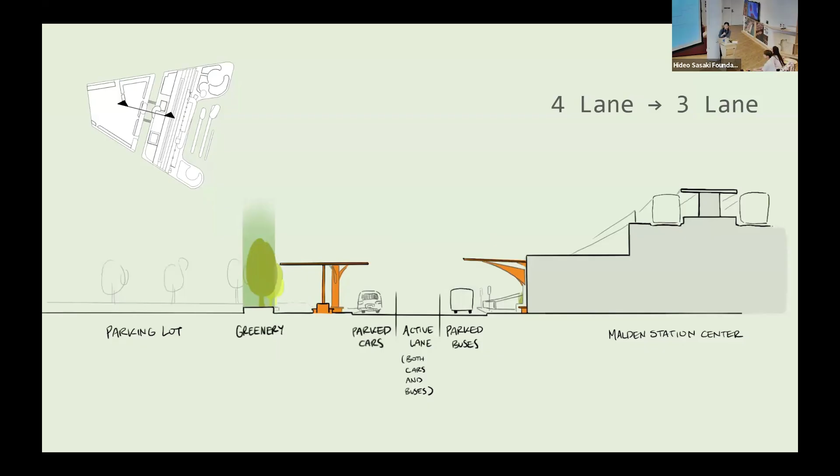We could turn it into 3 lanes by having one lane for parked cars or cars waiting for someone, an active lane for both buses and cars that are only moving, and also a lane for buses so they can still park, facilitating that transition from the station to the parking lot. There's also that soft boundary of greenery. It's still one way to keep that flow of what it used to be, and also rest stops in between.

This is what I imagined it to be through sketching, and in yellow is the design and how it could look. This is what it could potentially look like for someone driving through—surrounded by greenery on both sides and also rest stops.

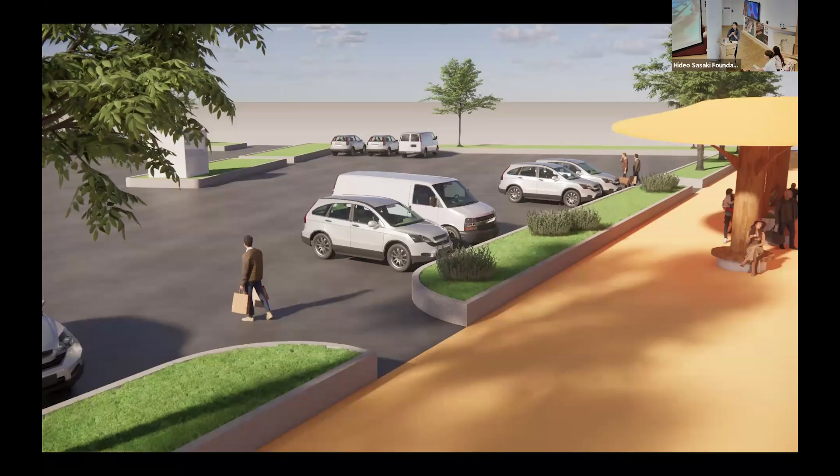And here's the more defined entryway. It does not look like anything like it did when I showed you earlier. Clearly the greenery is very appealing and also adds that color.

One thing I didn't mention is that the rooftops are specifically orange because it's the orange line, not because orange is my favorite color—it's a good design appeal for those who don't understand where the station is, and it also attracts people to use it more.

So essentially, in conclusion, we have these rest stops that will be shading structures and also provide comfort. We have this extra lane for people, which could also be a flexible lane for vendors if they want to stay on the side of the road and capture students coming out of work or school and sell them some boba or something. And also these defined roadways that indicate where people could enter or exit, so they don't have to jump over the fence anymore and hurt themselves.

And so this is what it would look like on an axon view. So, thank you.